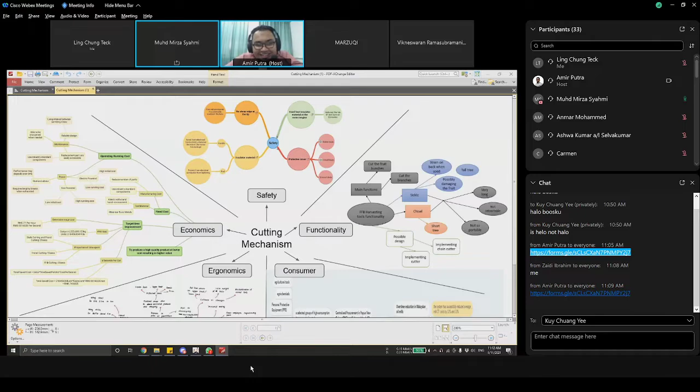Okay, so doktor, yeah, so we've done the discussion. There are 5 of us, so we are 5 people, so we took 5 topics. Oh, like that, ah. What I understand is that your idea was that everybody has to do their own background research for that particular topic, so this one is the safest way. Okay, so right, after that, the five of us together searched for what are the topics that we want to focus on.

So we started with safety, functionality, consumer ergonomics and economics. So from there we used a fair way to determine who gets which one, using a spin wheel. So basically it's random who gets which one, so we couldn't choose and pick which one we exactly want.

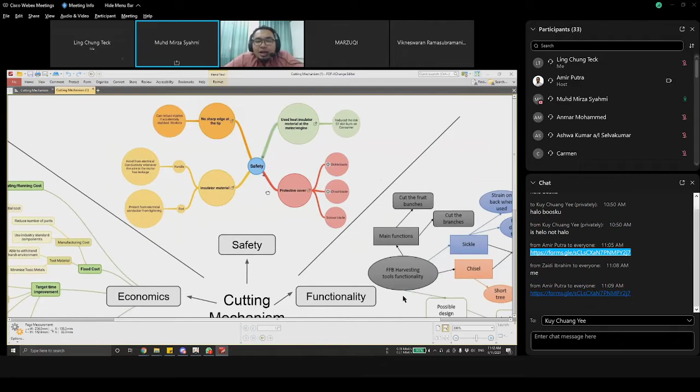Let's go to safety for a moment, I want to check. No, safety, sharp edges at the tip - no sharp edges at the tip, can reduce injury. Okay, this one is not quite right. I see, because, okay, what can you relate 'no sharp edge at the tip' with the currently practiced cutting mechanism?

I see, okay, right? This is the thing - the bubble map is different from objective 3. Objective, because the name itself is objective 3, so basically what do you want at the end of the day? So what do you want to achieve at the end of the day? So that is the objective. Okay, so that is the difference between objective 3 compared to the bubble map.

Bubble map is basically what is the current situation, in terms of definition for example, in terms of where it is going to cut. Okay, what types of cutting, what are the tools involved. Okay, when for example we say tools, tools for cutting the FFB, the palm oil one. Okay, so there you want to use what?

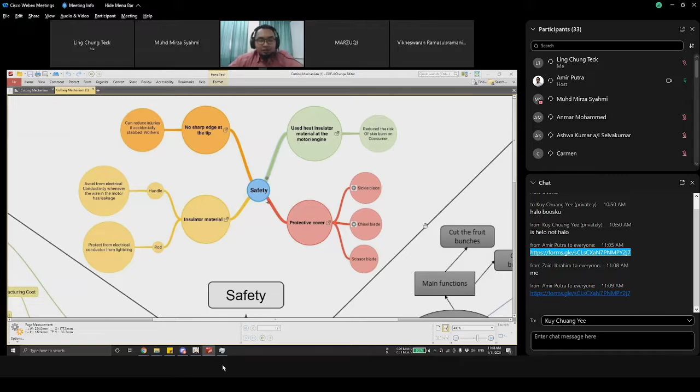See? Okay. So we go, you explore the current information available related to the problem statement. Related to the problem statement. Okay, so I think the other groups will be similar like this.

If you just look at something like functionality - chisel is the current one, short tree, sickle, possible damage to the fruit. This one related to current technology should be okay right? Okay, strain on back, okay, correct.

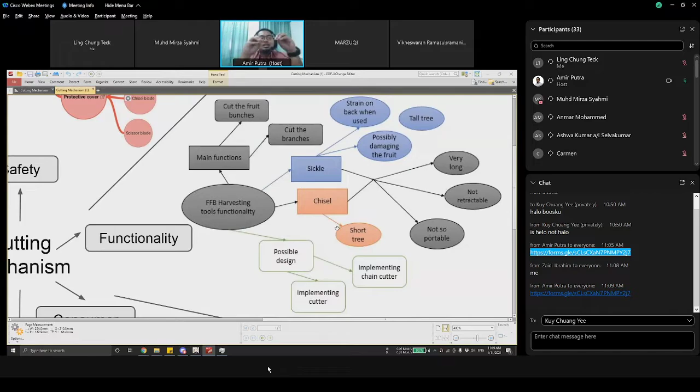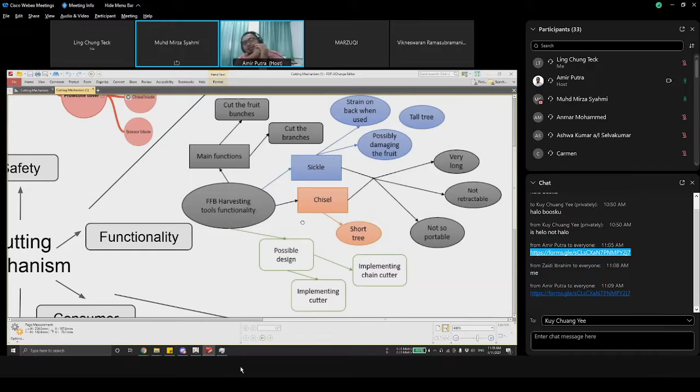Okay, alright. For consumer, this section focuses on - not really sure, but this one relates to who are possible consumers for the product, for this kind of tool. It's not about possibility, it's about who is the customer right now.

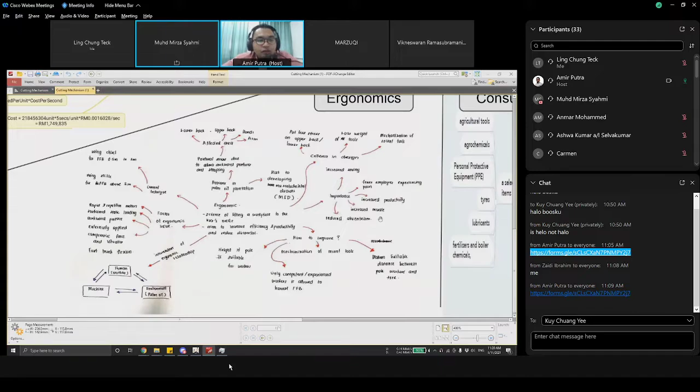I see, okay, alright. This is ergonomics. In December I will invite my colleague, my classmate from my degree time, he will give a talk on human factor in engineering design. He's now a member of the ergonomics society, so he'll give a talk on ergonomics. Hopefully they'll give you an advantage on this, but that's later in December.

Okay, alright, this one is economics - this one I did based on operating costs, how do you reduce operating costs, reliable design. This might fall under objective 3. Yes, correct. Maintenance, able to sharpen when needed, long interval between - reliable design.

This one I actually took from the internet, just to see what are the factors that increase the reliability. Reliability can become one of the main topics rather than become a subtopic under maintenance. Can I put it outside? Betul. Okay, because when we talk about why we buy this product, it's because this product is reliable.

So how do you define reliable? For example, even sharpening, how frequent do we need to sharpen - that one also falls under reliability, not under maintenance.

Maintenance is what we're looking at now, in terms of objective 3 later on. So in terms of maintenance, what do you define as maintenance? For example, it doesn't need many components, only one single part.

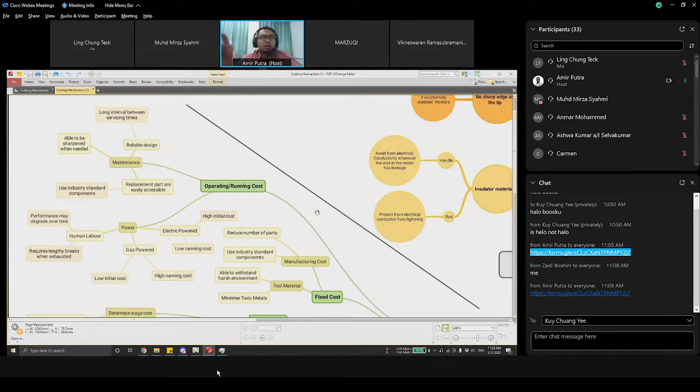So we don't need to service other parts, we just need to clean the tooling, that's it. So maintenance is very low, and normally once we relate it to maintenance, the way we assemble and disassemble the main mechanical component that involves motion, normally we make it a modular concept. So that when taken out, for example if you want to maintain your car, you don't need to open the chassis, you don't need to replace the whole thing, just open the hood to take out the engine.

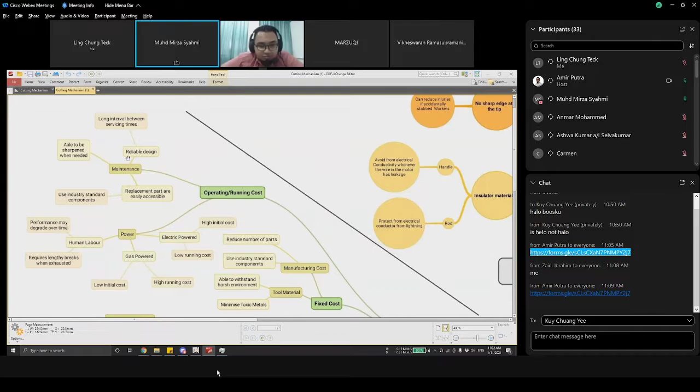So would the maintenance still be correct? This part would be correct, this part still correct. Okay, for example this is the power - I did research on electric powered, gas powered, and human labour.

For electric and gas powered, what are the cost and benefits? So this is our current one - human labour performance may degrade over time, requires lengthy breaks when exhausted. This is our current situation.

And then let's say if we take electrically powered, the initial cost for investment is very high, but running cost is very low. So should this go into objective 3 or can we keep it here?

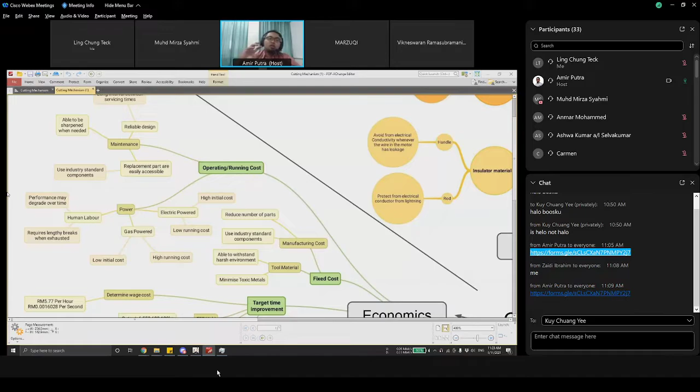Okay, so like earlier, based on the possibility you predict you want to have this thing on your final product, you need to put it in objective 3. If not, no need.

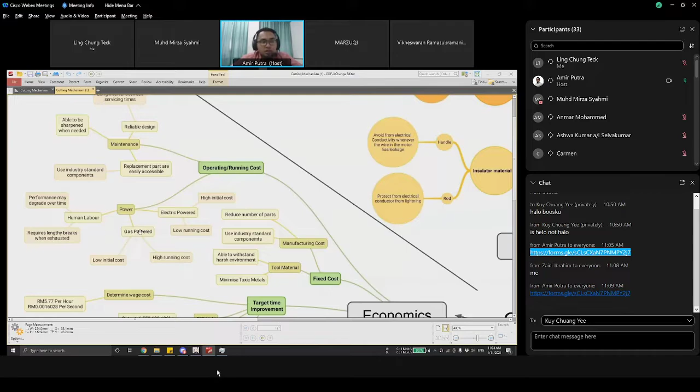Okay so let's look at the example, where we can include it. At the end of the day, these are the things you want - the features of our product that are mandatory. So like gas power, electric power - there's a possibility we'll only take one out of the three for objective 3.

Ya betul, I see. Okay, this is correct already, what you did in terms of understanding the power. Exactly. Okay so fixed cost is for material and manufacturing cost. For material, I guess if it's fixed cost for production, harvesting lah. Betul tu.

Okay, so this is target time for improvement. For this one I did some research using the annual report from Sime Darby Plantation. So first I determine the wage cost is about this amount per second. And then I find the yield using the hectares they actually own, and then their output per hectare, and then I divided by the weight of one FFB.

So we get this number of FFB, and then total saved cost is basically the number of FFB multiplied by, let's say we save 5 seconds, multiplied by the amount of money per second. So let's say we can save the process by 5 seconds, we would save Sime Darby 1.7 million.

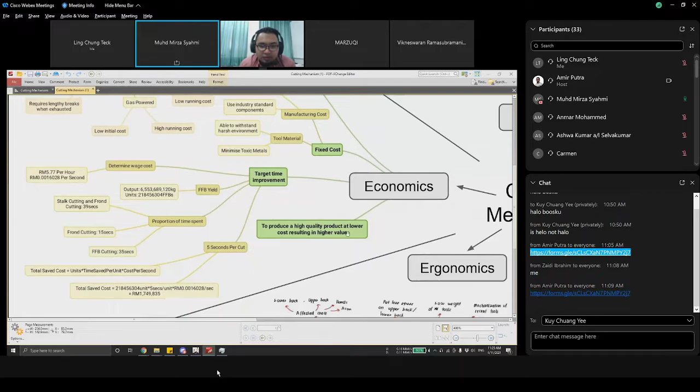Ya, that's productivity. Okay, good.

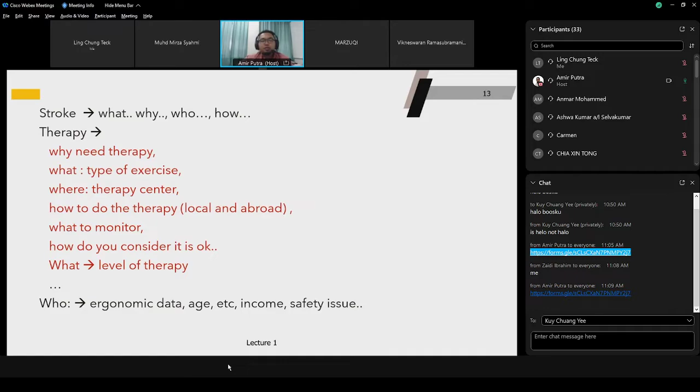Doctor, just to confirm this - basically we want everything that's a current issue, related to now, 100%?

Okay, and for example we can also take why there's an issue with labor. One, the first one because of government policy. Is there any other issue?

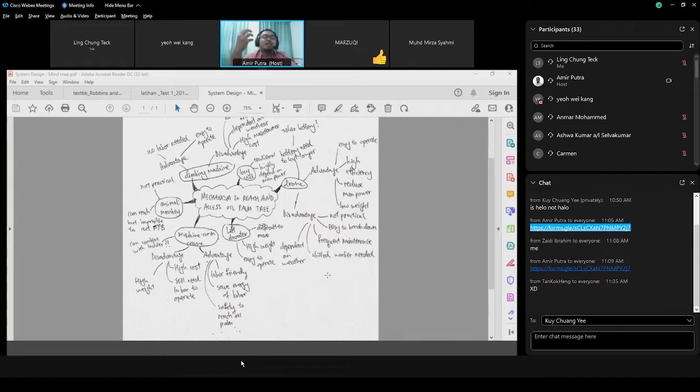Why? Why? Why apa? Why apa? Why would like to reach? So why apa? So kena tengok. So maybe what is the size of the fruit? So what is the weight? So you pergi the second topic is that you discuss detail pasal dia punya FFB tu. Fresh fruit bunches tu. You discuss detail pasal tu. You nak tengok loading ke, dia punya weight, dia punya size of dia punya apa kita panggil tu, tandan dia punya tu, tandan sawit tu. What is the size? You can go to that detail. So bila nanti contoh for example you nak access, you nak reach, you kena ambil kira all those element. So you kena tengok question apa you nak tanya. Then you expand it. Hopefully benda ni boleh selesaikan segera lah.

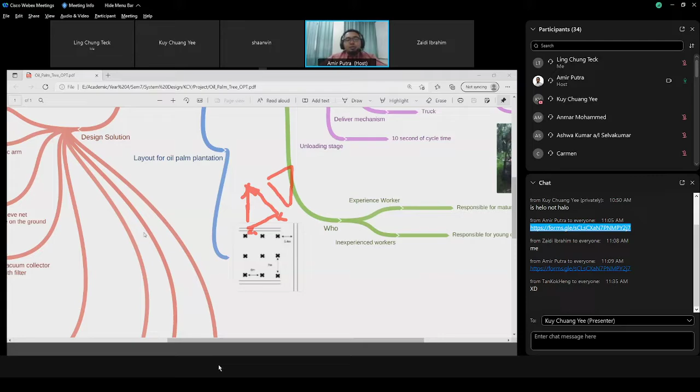Tu apa yang be implemented by Sime Darby. Dia punya distance tu later on saya rasa boleh dapat. Kalau tak ada, nanti kita cari. Saya boleh turun dapatkan, because I need to visit them next week. Kalau ada siapa-siapa nak ikut, tapi cost sendiri lah.

Okay, alright. And then we also list down the issues, the current issues in the oil palm tree field, like manpower issue, productivity issue, environment issue.

I think this one is better. I think it's almost complete, because what you need to do is list down. You keep searching, you see the video, what other information you can add up. Yeah, I think this is somehow a good example of the current bubble map concept.

Okay, in this mind map. Okay, right. So is it in objective 3 for the design solution? Sebab bila you buat design solution ni ada robotic arm kan, ni masuk dekat morphology nanti. Oh okay, morphology chart. Sebab dia pergi pada feature, function and shape.

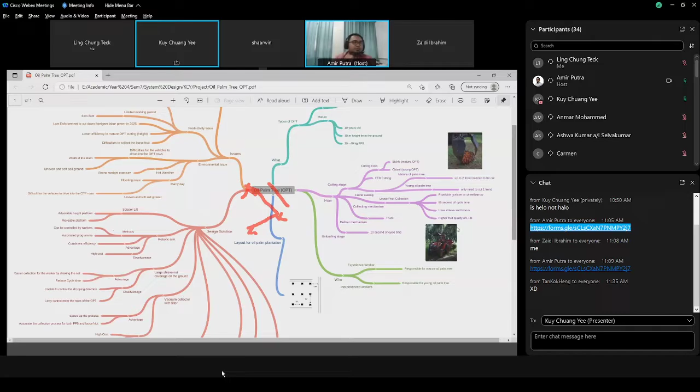Okay, I think this is good. Okay, ada lagi? Tak ada dah? Tak ada. Alright, okay, thank you Kui. Thank you.

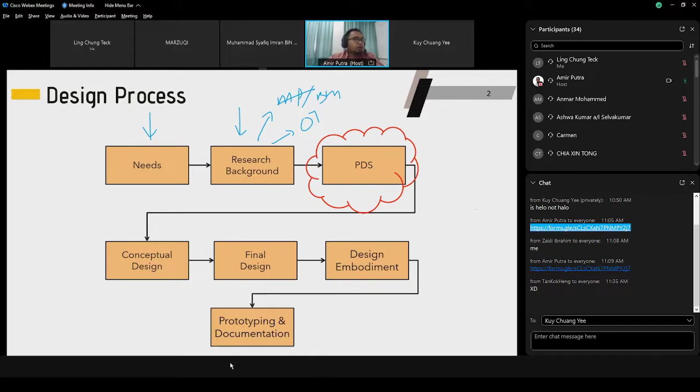Okay. And then after that, settle with that objective 3, what do you want? So we proceed with the PDS. So we want to set what is our product specification. This is what you've done before during I2D. Okay, so PDS will give you limit to your design.

So we don't want you to set, okay we want to go up to maximum 30 meter. Come on. Okay, better to set in terms of the medium one, go for example 5 to 10 meter. So this is you set the limit in terms of average. That is the easiest way. Don't set, okay we will reach 10 meter.

For example, once you conduct your concept generation, you make modeling, 3D model, and then you try to make virtual prototyping, and don't reach 10 meter, you only get 8 meter. So what do we say? Your solution is not correct, because it doesn't follow PDS. PDS mentioned 10 meter. So this is where we give room, tolerance, so that you can have a range.

Okay, whatever falls within that range, then that is acceptable. Alright. So where does value 5 come from, where does value 10 come from? This is from your research background. From your searching, from your market search.

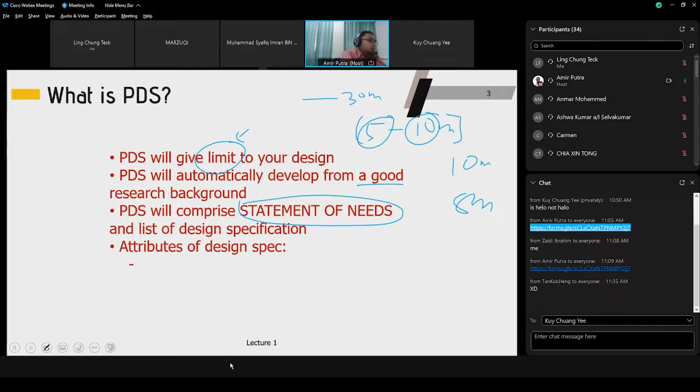Okay, and then attributes of design specification. This is example of PDS. For example, the statement of need: to design and build a design-to-win robot for robo combat competition. So design spec is what must follow game regulation. This is design spec, the first design spec.

Okay, put the weight maximum 25 kilogram. So that means if this robo combat is 1 kilogram, also acceptable. Okay, so what is the size? It mentions maximum, so whatever value below that value is okay. So that is how we interpret the specification.

Okay, so it must be able to move or return to its original orientation. This is important. So for example, if you propose a concept later on which does not follow this move or return, your concept will be scrapped. Alright, because you are not following the PDS. Alright, for example, maximum traction. So here it didn't mention any value.

This is a bit tricky, but somehow my suggestion, this is not the correct way. You need to put what is the maximum value. Okay, so maybe you put it in a range. So why do we need maximum traction? Because to ensure that our robot can win during that competition. So what is the traction that you want? So we need to specify so that you target that specification, you will design based on that.

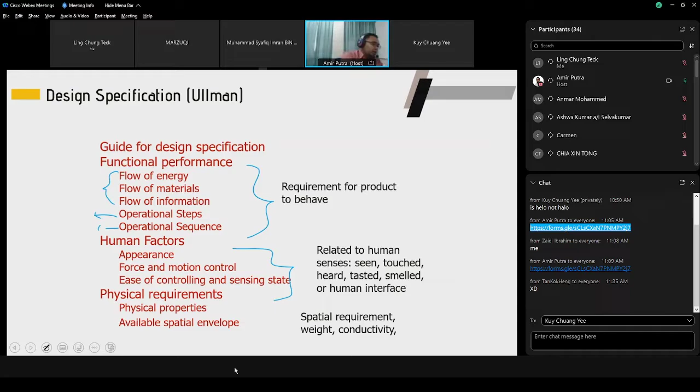We can also embed certain parameters in terms of human factors, related to human sense, in terms of appearance and aesthetics. How do you measure aesthetics in an objective manner? A lot of it depends on human perception, so you can put it on a scale - I'll show you later. Then there's physical requirements about physical properties as well as available spatial envelope.

Continuing from this, reliability can also become one aspect of your PDS. What are we looking at in reliability? Mean time between failure - what is that? For example, if a harvesting technique works for only 10 times and then fails, that is not reliable. Better to use the old version. How long can it last, how many years? So how do we calculate that?

Can we analyze if it will stand, for example, for 10 years? You need to calculate based on static and dynamic cycling analysis - this is fatigue analysis. Is there any fatigue point in that particular cutting tool? To that extent, we can expect - so here you put reliability, for example, 10 years - then you need to prove later in your calculation that it can withstand up to 10 years.

Safety, hazard assessment. Life cycle concerns in terms of distribution, maintainability, testability, and also retirement. You need calibration and changing. But normally in life cycle, we are concerned with maintainability issues.

This also continues from the last one - resources concern. Is there any issue with time, any time constraint? For example, for this system design, what is your time constraint? You have another 10 weeks to complete this project - so that time needs to be put in terms of resources concern. Is there a cost concern? I think yes, cost is a concern - what about your capital expenditure, your CAPEX needed, and how many units do you require?

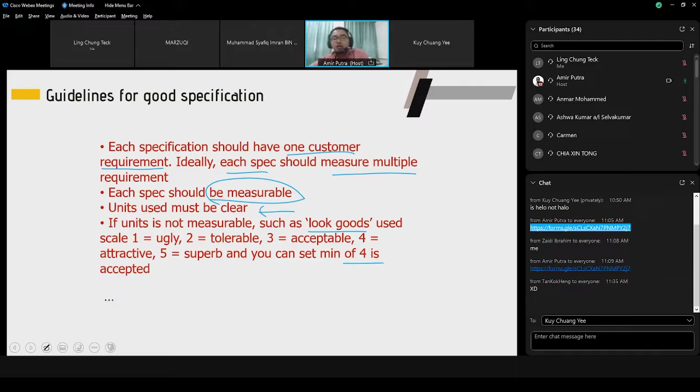So you must use a scale to ease us to give a rating. The scale: number 1 is ugly, 2 is tolerable, 3 is acceptable, 4 is attractive, and 5 is superb. And then you decide, you set the minimum scale as number 4, that is the accepted one for your product design specification.

Okay, that's it, done. We will see the example of PDS that I would like to show. Is there any question?

Is Sabbir here? Yes, doctor. Is there any question from you? So far, no, it's okay, sir.

Alright, this is an example of PDS in a statement of need. You must put it in a statement. Last time in my I2D class I summarized it in terms of a table, that was for the introduction class. But for system design, we have agreed to make it in terms of a statement.

So how do you want to do a statement? The first one, you put your mission statement. Here is an example: a beach cleaning machine.

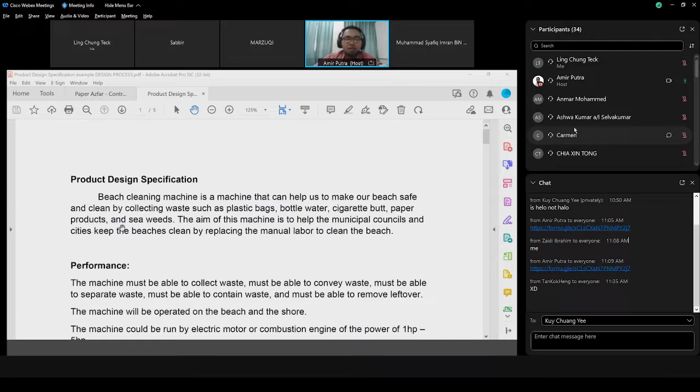Alright, settled with that. This is your first PDS parameter in terms of performance. The machine must be able to collect waste, must be able to convey waste, must be able to separate waste, must be able to contain waste, and must be able to remove leftover.

This refers to the functional process of that machine, so this is what is meant by performance. This machine can function to collect waste, so that is the first function, the functional parameter that you specify in the PDS. This machine must be able to function in terms of collecting waste.

The second is must be able to convey waste, the third is separate waste, number 4 is contain waste, and number 5 is remove the leftover. So these are the 5 functions that must be in that beach cleaning machine, you need to specify this in terms of performance.

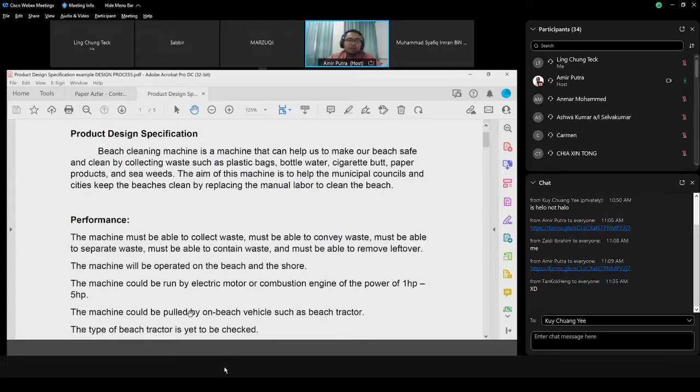The machine could be pulled by on-beach vehicles such as beach tractor. So based on this statement, we could understand this performance means they didn't design a complete whole set with the tractor. No, this is the kind of attachable, attachment to the tractor only.

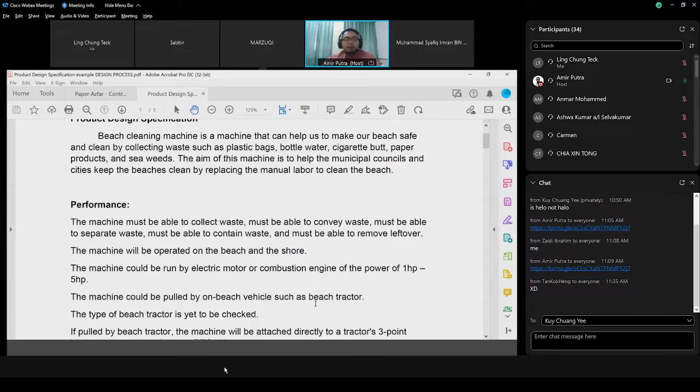The type of beach tractor is yet to be checked - I think this is not a good statement. Better you need to identify the types of tractor used, because different tractors will have different joints to assemble and different systems. Sometimes probably this tractor is using hydraulic, another tractor maybe using pneumatic concept, another tractor maybe fully mechanical one. So that one you need to specify.

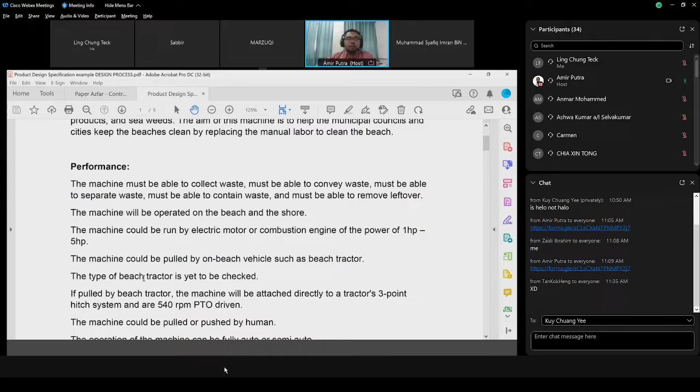If pulled by tractor, the machine will be attached directly to a tractor's 3 point and 540 RPM PTO - PTO driven, that's the coupling. The machine could be pulled or pushed by human.

The operation of the machine can be auto, semi-auto, and the pickup weight for full load of this machine is 10 kg, the speed is 20 and so on. So I will give you this PDS, you need to go through it so that you have a clear picture of what parameters will be involved in your PDS.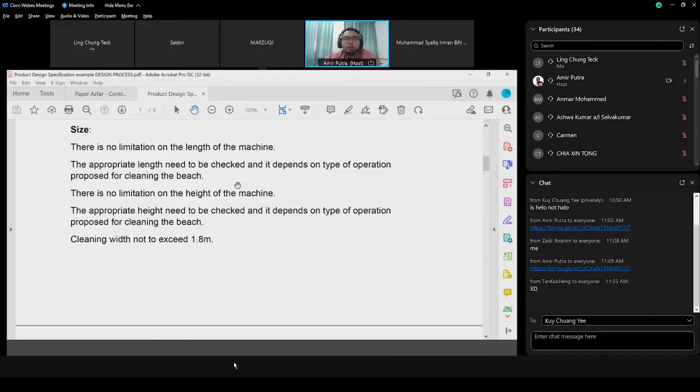But somehow you need to specify, because after this you need to propose your solution through your sketching. For example, your colleague, your team member designs a 1 kilometer length - even though that doesn't make sense, it still follows the PDS. So that is not correct. Better to put some value - put the maximum one if you're not sure yet. The appropriate length to be checked and so on. This is not a good example, but somehow you need to put some value that is measurable.

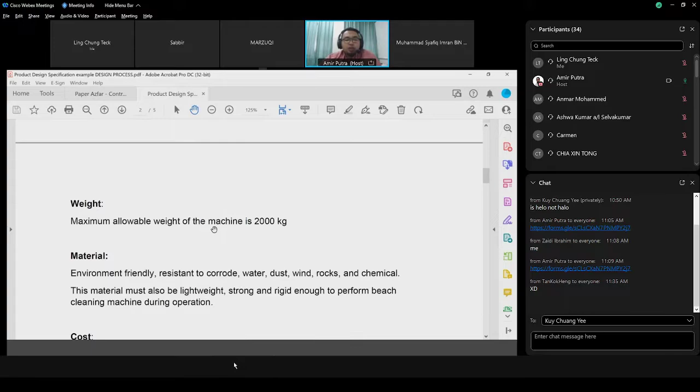Cleaning width not to exceed 1.8 meters - this is fine. Weight 2000 kg, material environmental friendly, resistant - that is a category, that is okay.

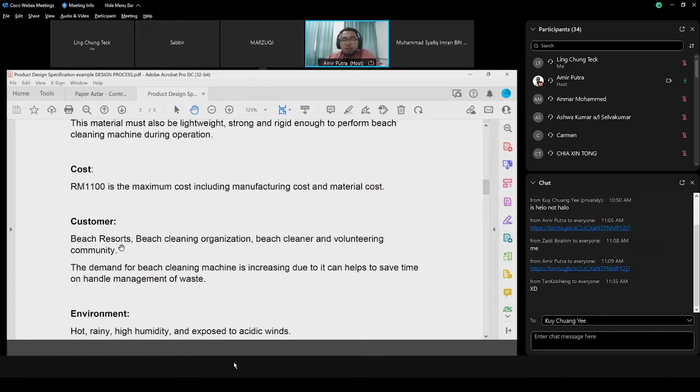Cost, estimated cost. Customer - who is your customer target? For these cases, for this project system design class, you can go to any plantations that require this machine, focusing on the SAMDABI. Environmental - what is about the environment involved?

For example, our country Malaysia - hot, rainy, high humidity at the plantation and so on. How many quantity? What about maintenance? Easy to maintain - maybe you can set how many parts required. All critical parts must have spare parts.

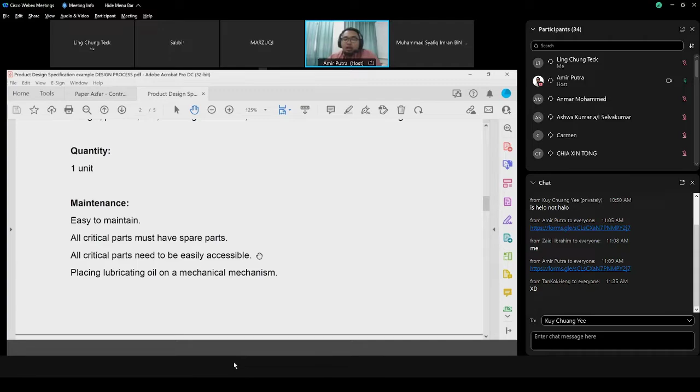This is for example only - do not copy and put everything. Select the one that suits you best. You can add up based on your requirement.

Product lifespan, competition - this is competition, you need to check who is your competitor right now. How to know? Research background, market survey. So standard as well - how to check, doctor? Use patents to check these things. Alright, service line and so on.

You can read through this PDS. I will put it in the group as well as in e-learning later on. Is there any question on PDS so far?

No, clear eh? Alright, no doctor. Okay, so we proceed to the next one.

Kenapa saya nak cepat? Because Kabir tak ada kelas, so nak kena cepat. Source of idea - okay, just a quick run through for source of idea, so how would you like to do it? I think you have done correct, done this one, we skip lah.

Okay, I will move straight forward to the concept generation, because later on after this you need to discuss in terms of functional process. Nanti sama juga ni, kejap.

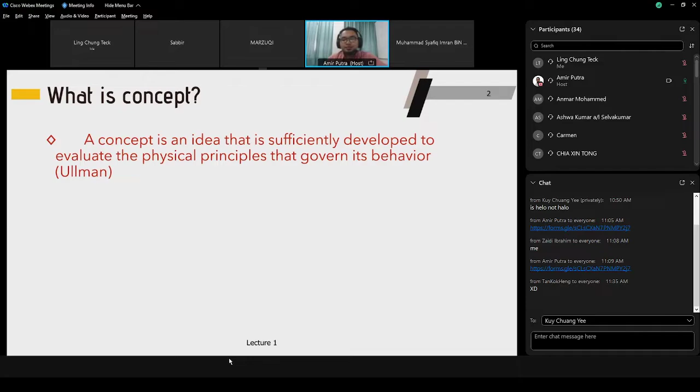Okay, we go first about the concept. So what is a concept? A concept is an idea that is sufficiently developed to evaluate the physical principle that governs its behavior. This is by Ullman. So this means you will propose a conceptual solution that will solve the problem or the needs provided. That is the whole idea of the concept.

Concept generation involves this 5-step method. The first one, this is what you have been doing: you clarify the problem. Through what? You understand it, you do the bubble map, you assign the task to every single person.

And please, again, I would like to remind everybody in your group, must do their job, their task. Don't protect your colleague, don't protect your member - it's not good for them. Because next year or later on you will become an engineer, so it's not good for them. You need to know how to search all these things.

And then you do the problem decomposition, you do the objective tree, and then you focus on critical sub-problems - so what are the main key areas there? So harvesting technique, that's what we do on the objective tree and so on. Alright, you come up with a kind of PDS. So right now we would like to detail this PDS.

So after that, what you need to do is go for the search externally. What do we mean by search externally? You refer here to lead users. For example, based on Samdabi - our client right now. Samdabi is our client, he asked for harvesting, mechanization of harvesting palm oil. So what are we going to propose? So you can search externally based on this user.

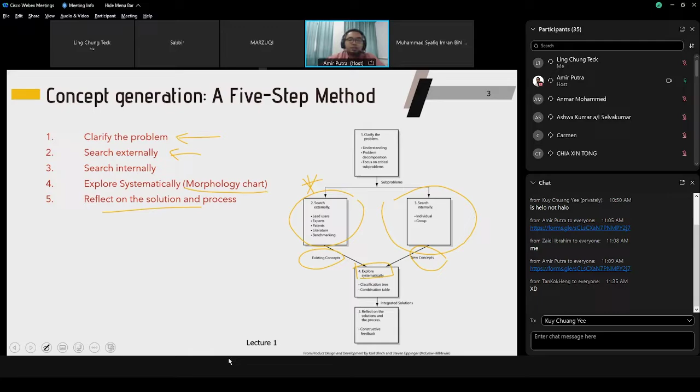Okay? So every single person needs to propose their own concept. The first one, clarify the function - already told you. So the first one is you need to develop a general statement, define main function, kind of the first statement performance inside the PDS, right?

The second is create sub-function description. Order the sub-function - function, we are referring to the function, not numbers, length and so on. We are referring to the function. Here is clarify the function only.

So develop the general statement - this is what we mean by develop the general statement. Goal is to generate a single statement of the overall function. Basis of the statement, functional aspect based on the... what is RE? I think it was mistakenly put here.

So based on the problem, for example, here is the coffee maker example. What is the input? Input here - water and coffee powder, simple right, so that is the input. So what is the output that you want? Coffee. Done, this is what we did.

We go to the hotel, for example, for breakfast, we see the coffee maker machine. We would like to have an espresso coffee, then we press that button, after a few seconds we get our coffee. Done. So what we want to know is what happened inside that coffee machine?

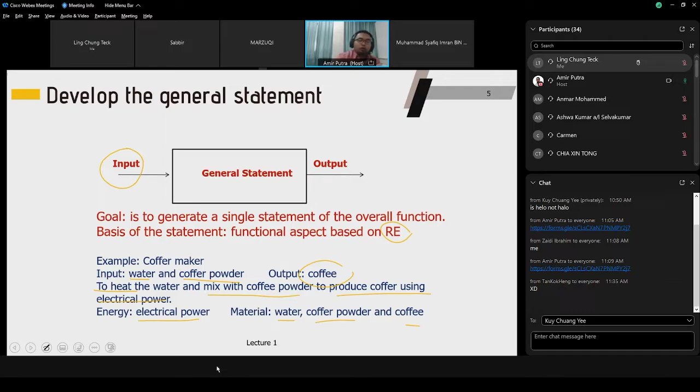So create the sub-function from the example. This step we identify the sub-function needed. So the guideline for this: an object that has energy, material, and information transferred from one object to another.

For example, coffee maker - people will switch on the coffee maker, you press the button, then the coffee maker will boil the water and mix the coffee. So this is the information we can gather, with the hot water and finally producing a cup of coffee. So the energy involved is switch on, the heat to the water.

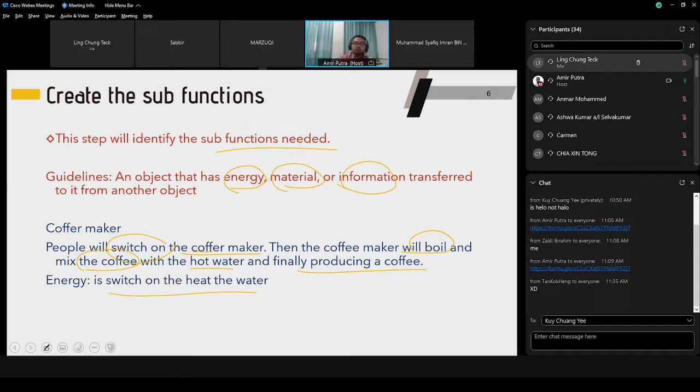So order the sub-function - right now here we create the sub-function, and the third step is to order the sub-function. Once you order, you want to put a number. So this is the first one, boil the water. Second function, mix the boiled water, and the third one, filter the mixture. You cannot put filter the mixture first.

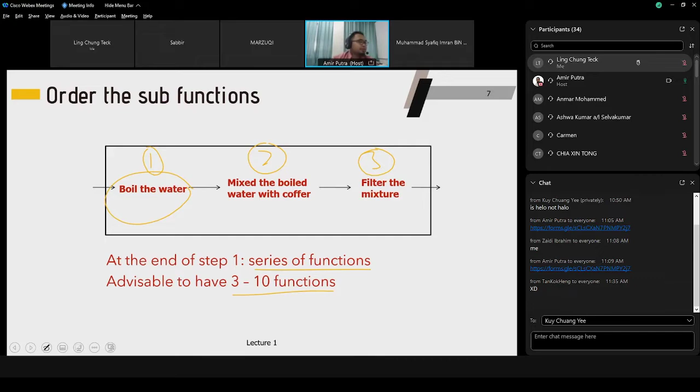So you need to put it in an order because that is the function that you want in terms of sub-function. So at the end of step one, there should be a series of functions, and it's advisable to have 3 to 10 functions. This means to boil the water, what is the sub-function involved - electrical power, energy and so on, you need to put here. It must be ready, a cup there and so on - you need a container to hold the water. So those are the features, later on in the details of the sub-function.

So refine the sub-function - there's no right and wrong. The concept here is very important, no right and wrong, but most importantly the function decomposition. We decompose the function, and it must be comfortable with the team member.

You cannot have a one man show. Even though there must be one person who gives the idea, you need to discuss and accept together. This is the really critical point.

Because if you don't agree in terms of the process and the PDS, your concept solution, I can identify that you are not following the discussion as well as the PDS. Inside the PDS, the product design specification, is basically a statement. Behind the statement, of course, you have a discussion, and a lot of things have been considered before you come up with the final decision. So once you follow with that, you have a clear picture of what things have been selected.

A good rule of thumb is 3 to 10 sub-functions. Certain designs require 2 or more overall function decompositions. This is straightforward. After that, with the order and sub-function, we are already clear with the functional process and the functional structure.

Now we move to the details, in terms of a systematic approach, we are using the morphological chart. Morphology refers to the function as well as the activities. For example, to boil water, how do you boil water? What would you consider, by heating? What else? How? So you give an option. This is the first function.

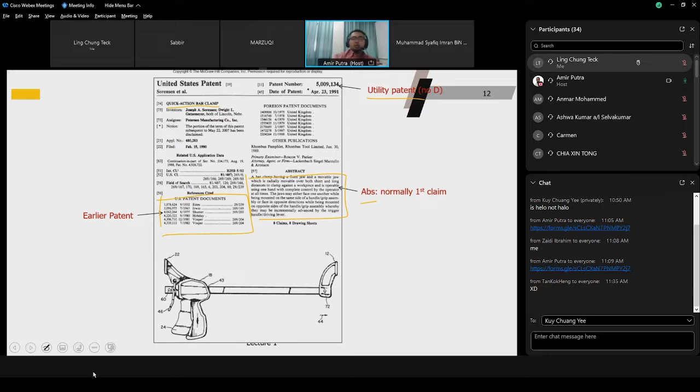Alright, so number 3, step 3 is basically search internally, which I explained to you, which is we apply a creative approach through brainstorming, no hindrance. Don't have issues of disagreeing with people. If you disagree, please be in harmony. Let's give positive feedback, don't scrap your idea or other people's idea.

Explore systematically. We are using the morphological approach, and then the concept combination table that I told you just now. This is the concept for every single person. I think many already know this, I will show you after this.

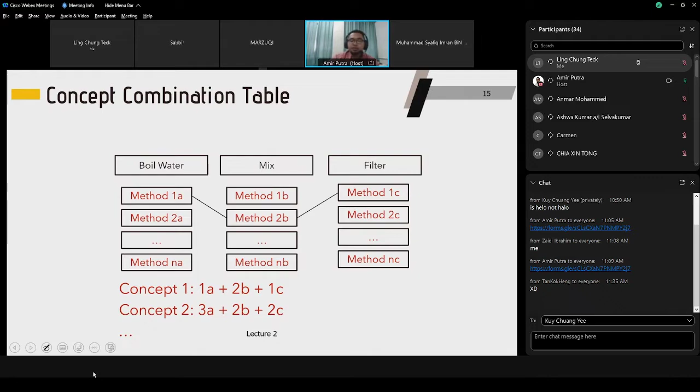Okay, and then reflect the result. Are your team confident with that solution? It can be this way: for example, later on, you have 5 members in your group, every single person will propose their concept solution through sketching.

And then, before you do this scoring matrix, you can give advice to your colleagues. I think this is not a good sketch, you are not following our PDS. You can do that, but somehow it must be done in a harmonious way.

Alternative function diagram, an alternative way to decompose the problem. This is the way to refine and reflect the result. I will skip this one, and this one as well. This is more in terms of the flow of energy, material, and information.

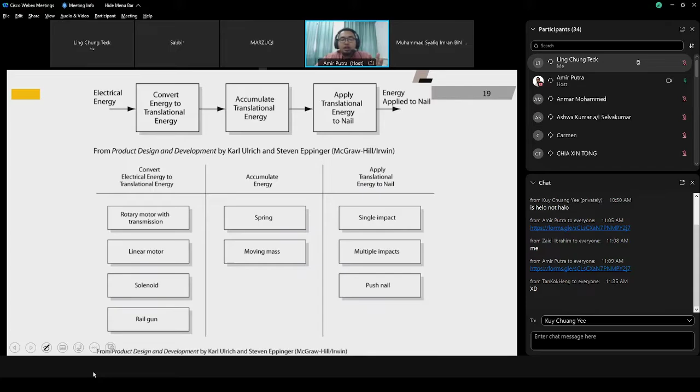Sketches in conceptual design are important to explain the function, forms, and components. Functions, forms, and components, you need to be detailed, to a certain detail, up to being self-explanatory. I see your sketch, this is what?

Okay, so what is the function of the bolt? Where is this bolt located? We need to see clearly in your sketch the level of detail that I mean, to the level of self-explanatory. You can do a self-assessment to check whether your sketch is sufficient or not.

Alright, I will put an example of the coffee maker case study. I think this is for I2D class also, I have shown this previously. So this is the way we come up with objective tree.

So basically what we want at last of our automatic coffee machine is in terms of safety. So what do we mean by safety? In terms of it doesn't burn our skin, and splash proof. Here we might think splash proof in terms of the flow rate of the coffee poured to the cup nicely and don't splash. So you need to control the flow rate once pouring.

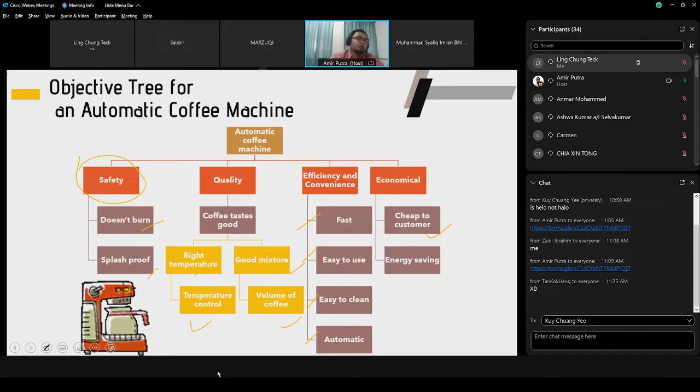Same goes to economy: cheap for customers to buy, affordable price, and energy saving with low kilowatt use, for example. Alright, so overall function diagram.

This is the input that we want, and lastly we have the coffee beverage. So we might think of what flows are associated with materials, energy and information, which should be in logical or temporal order. So this is the function tree that we need to look at.

I think you are familiar with this, so I will skip it. Lastly we deliver the coffee, and because this is the process, the function process, the sub-function process, that's why ideally we involve 2 or more, but normally it depends.

So for function structure, this is what we mean by flow of energy, flow of materials, and lastly flow of information given inside the flow of functions. Okay, up to these details.

But somehow normally I will just focus on the mechanical part. But this is really important so that we have a clear picture. What is the energy involved? Conversion of energy, what are the conversions of material, what are the conversions of information involved? This is a good example.

For example, conversion of energy: changing energy from electrical to mechanical. For conversion of material: solid to liquid. So what do we mean by solid to liquid? The coffee powder is in solid state, you want to change it to liquid. So what are the elements involved?

Same goes to the conversion of information, changing the signal from mechanical to electrical. From the trigger button, it will trigger the electrical part to flow to boil the water. So this kind of information we call as function structure of flow information, functional flow.

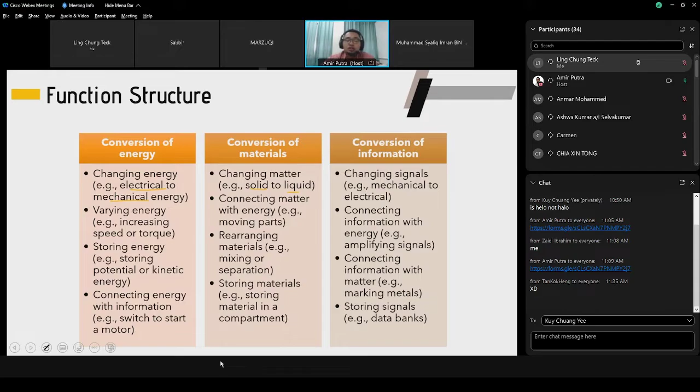This is the function structure, what I mean you need to deliver later on. This is the function structure that I mean you need to deliver later on.

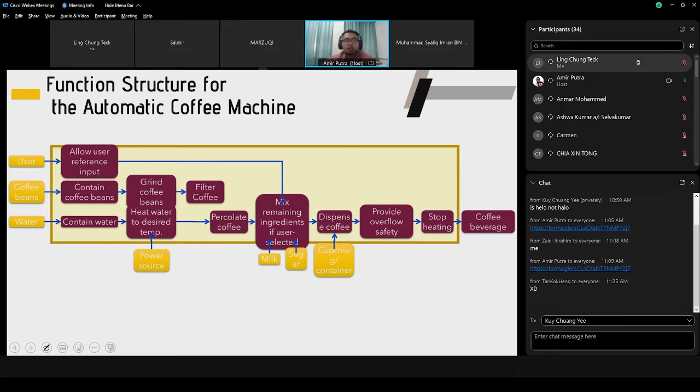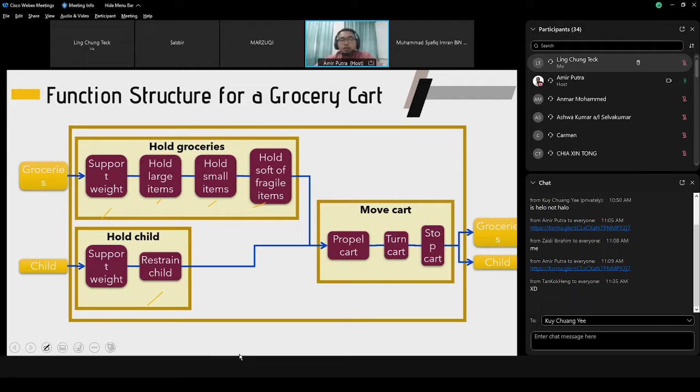This is another example from the grocery cart, the trolley. One is to hold the grocery, support weight, hold large items, hold small items, hold soft and fragile items. And then another feature is to hold a child. This is 2 sub-functions that you want in a grocery cart.

For example, the coffee maker just now, to boil the water. How do you boil water? Here is your first option, second option, the method. Method number 1, method number 2, method number 3. For example, to boil the water, the first option you put a heater, and option number 2 you put 2 heaters. That doesn't make sense, that's only quantity.

We are referring to the function, the physical shape, the verb, what it is. We are referring to the shape, what is the difference between this one and that one in terms of shape, not the number.

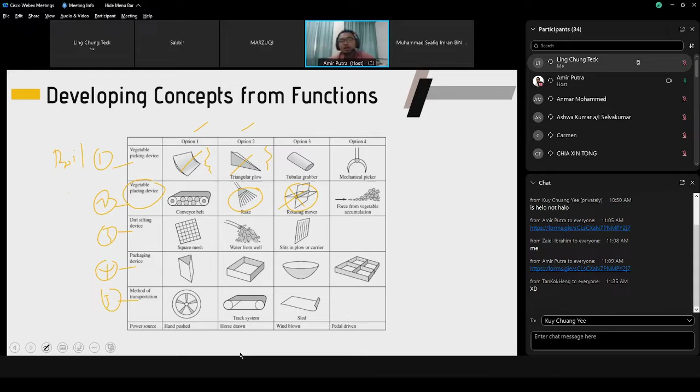This method will serve the function, so you need to provide this morphological study. Later on we will discuss the concept sketches. There is a way to know the detail of the sub function - a method we call reverse engineering in the function decomposition method.

Reverse engineering is a method to understand how a product works through a dissection process. I believe you still remember last time you did the dissection process using the mechanical pencil or mechanical pen, as asked in the introduction to design class - you need to disassemble all the components and put them in front of you on the table.

You sketch every single component, then write number 1 up till the end of the number of components, list them down, and then assemble again - all these things need to be sketched. This is how we do the dissection process to have an idea of the components, the detail of each component involved, how many, and what each is used for.

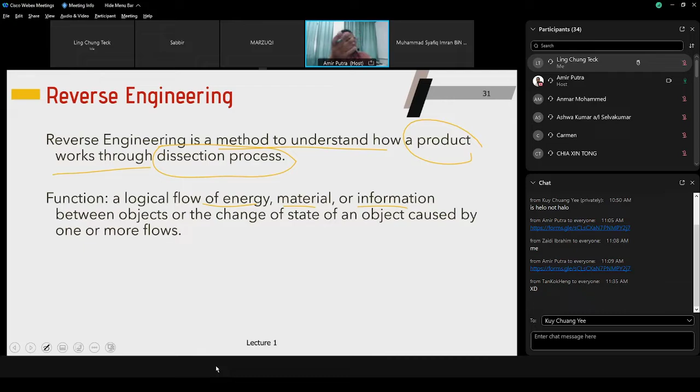Same goes for the function we are looking at - the logical flow of energy, material and information, between objects or the change of state of an object caused by one or more flows. The steps in reverse engineering, I think this is common to you.

Step 1: examine the whole device, examine the major interfaces. Step 2: disassemble the part for more detailed study - you can sketch the single part. And lastly, examine each interface in terms of energy flow.

This is the concept of reverse engineering, or what we call the functional process. As I mentioned above, I've said many of the same things again now - energy flow, information flow, and material flow. This is how important it is that you conduct it this way.

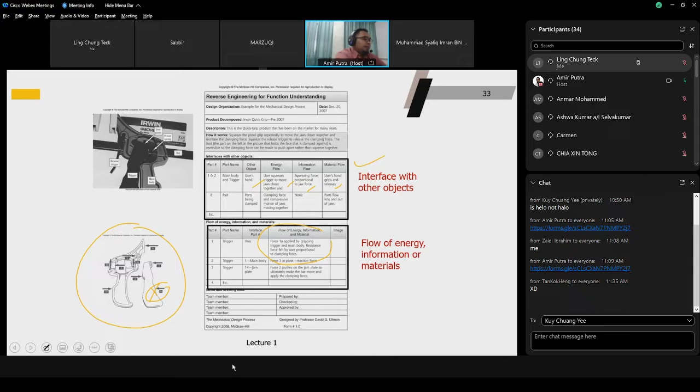For the flow of energy for the trigger - what is the flow of energy, information, and material involved? Force will be applied at point 1A here, by gripping the trigger and main body, resistance, the force felt by the user proportional to the clamping force. This detail will provide you a clear picture of the whole function involved in your product solution.

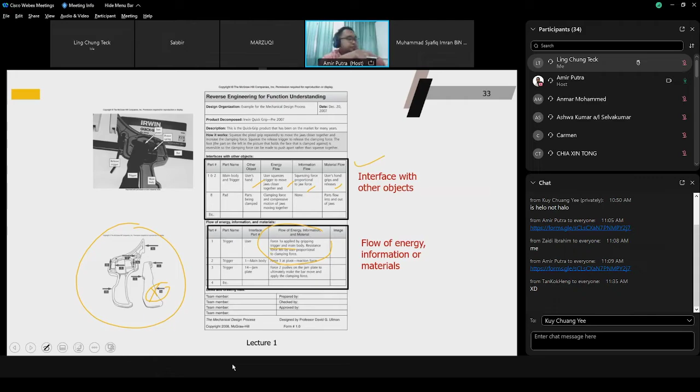I think for the last one, I would like to show you a video. Let me share a little bit.

This is the last one. So. Okay. Stop sharing.

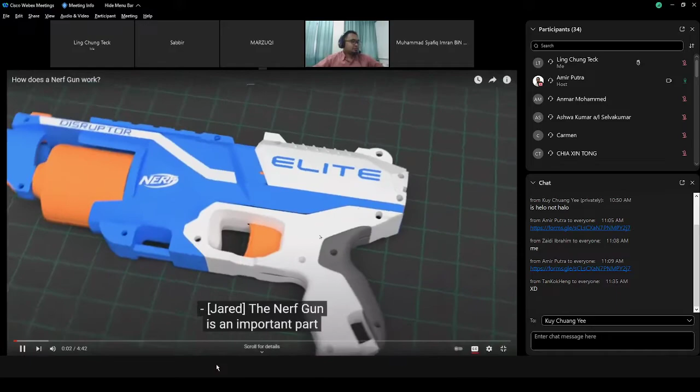Advertisement: The Nerf gun is an important part of every toy collection. Good for target practice, Nerf battles, and reverse engineering them so we can see how they work. Let's get ready to have some fun.

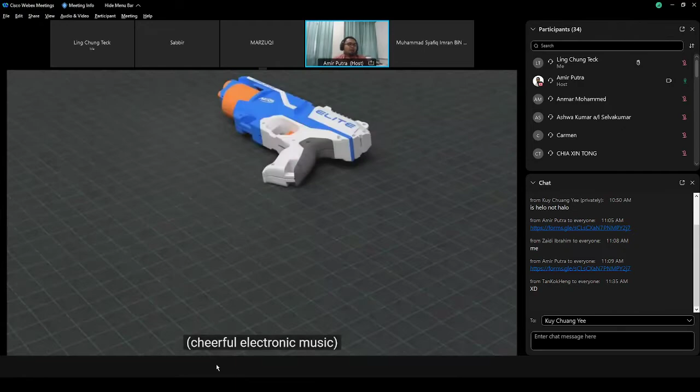This is one way to help you understand the subfunction, to detail the subfunction and examine the flow of energy, information, and material.

This specific Nerf gun is called the Nerf Elite Disruptor. 6 darts can be loaded in at one time. Pull back on the cocking mechanism, aim, and pull that trigger.

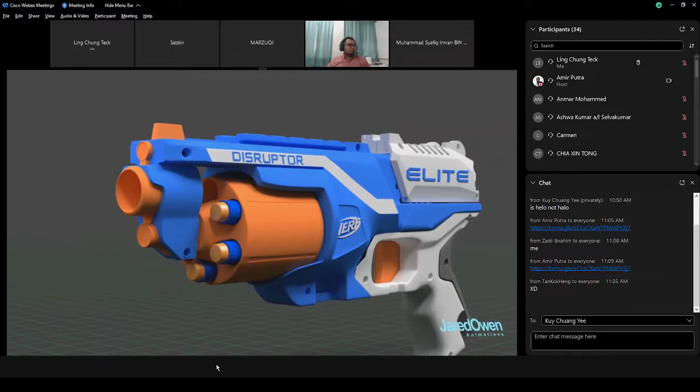You'll see on the left side of the gun a bunch of holes for the screws. If we take them all out, we can get a good look at what's inside.

Naturally, let's start with the trigger. You can see it's connected to a spring. You can pull the trigger back, but as soon as you let it go, it will spring back into its original position. You can see a bunch of extra plastic here.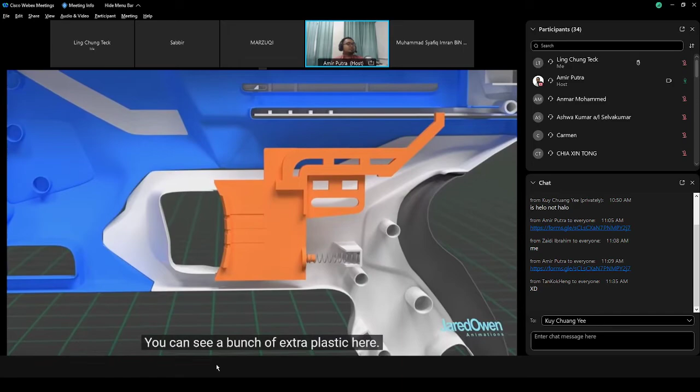This connects with another piece, which I'm going to call the vertical slider. This is normally held up by a spring. When the trigger gets pulled, the vertical slider comes down. I'm going to come back to this in a second.

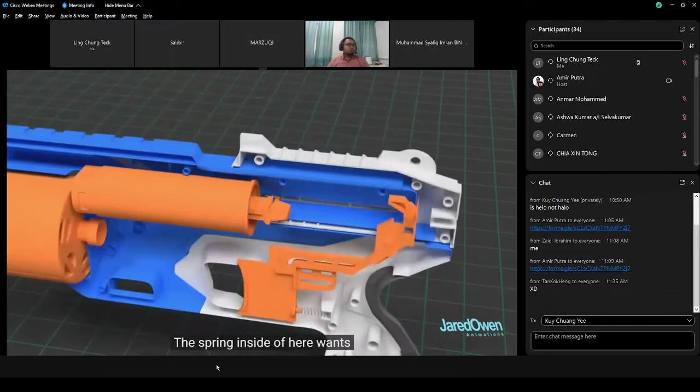This is the piston. It fits inside the tube along with a powerful spring. The spring inside here wants to keep the piston all the way forward. This is where the cocking mechanism comes into place.

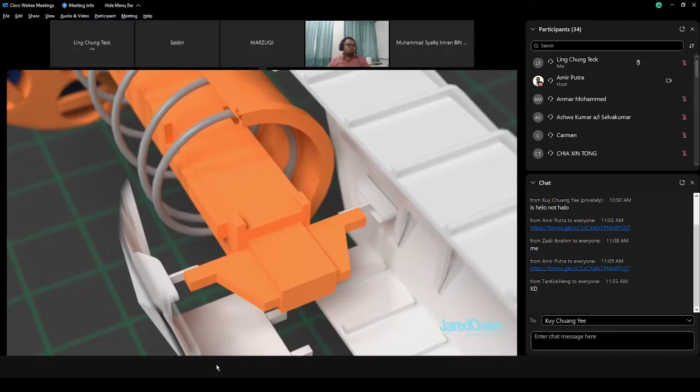Notice this small block sticking out here. When you pull it back, the piston comes with it. You can definitely feel that the spring is resisting as you try and pull. Pull it back far enough and it engages with the vertical slider and hooks in right here.

Now your Nerf gun is loaded and ready to go. One thing I want to point out is that when your gun is loaded, this orange strip will be visible from behind.

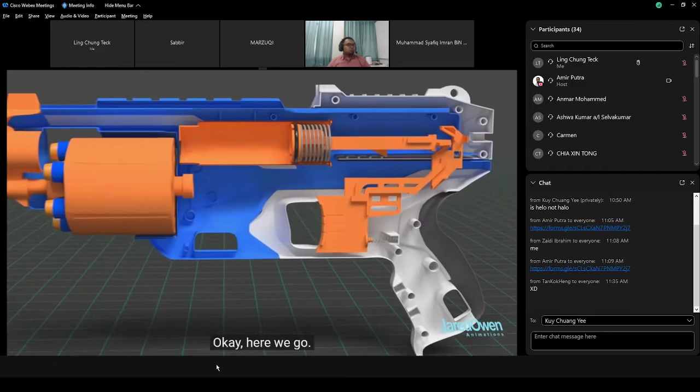Okay, here we go. Pull the trigger, the vertical slider comes down, which then releases the piston, which quickly springs back into place. All of the air inside the tube is immediately forced out the front onto the dart. Now after the dart fires, the cylinder rotates and the next dart goes into place.

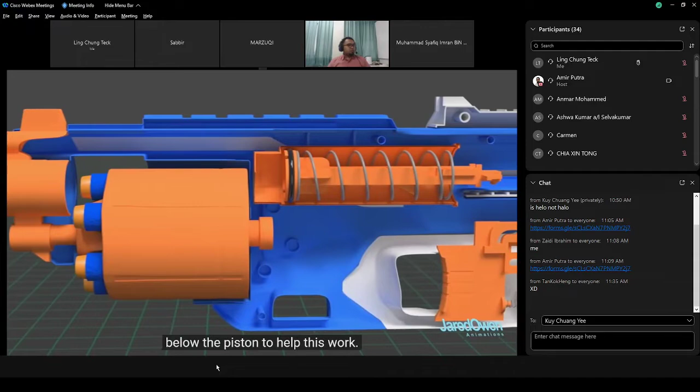Now how does that work? There's a few more pieces below the piston to help this work. There's some supporting black plastic, a white rotating cam, and the cam bar. When the piston comes out far enough, it will latch onto the cam bar.

When the trigger is pulled, the piston is released and the dart is fired, just like we've seen before. Followed closely behind that, the cam bar comes forward again, which rotates the cam, which then rotates the cylinder with all the darts.

Let's focus on just the cam and the cam bar. You can see each time the bar goes forward again, the cam rotates. The magic happens on the other side.

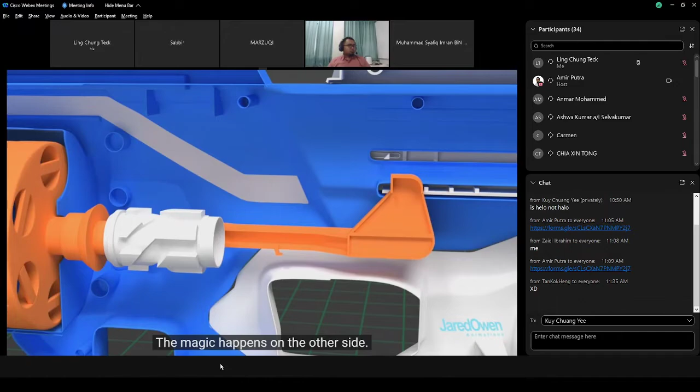The bar has a circular tip at the end here. The tip fits right inside these grooves here on the cam. As the bar goes back and forth, the tip will slide right through here.

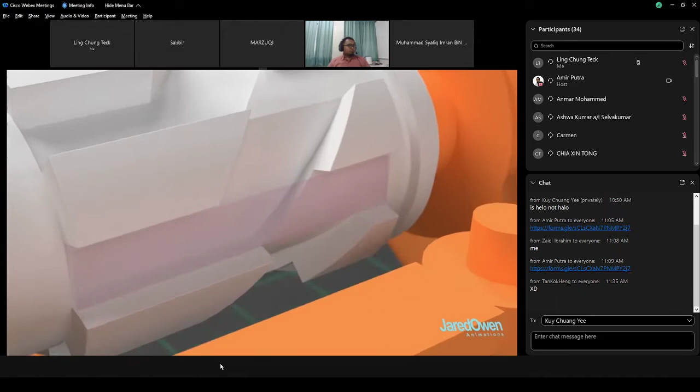Now the bar is positioned in such a way that there's a little bit of pressure. It wants to go into the cam. As the bar comes back, it will pass over this edge and go further into the groove. When the bar goes forward again, instead of returning to where it was straight ahead, it will follow along this side. When that happens, the cam is forced to rotate.

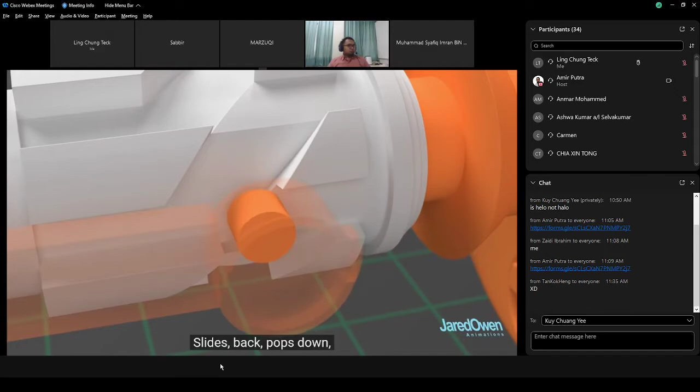Let's watch that again. Slides back, pops down, comes forward again, and follows the curve. Mechanical devices like this fascinate me. I can only imagine how much work this must have been to design something like this and make sure it works correctly. Currently, you can get one of these Nerf guns off of Amazon for about...

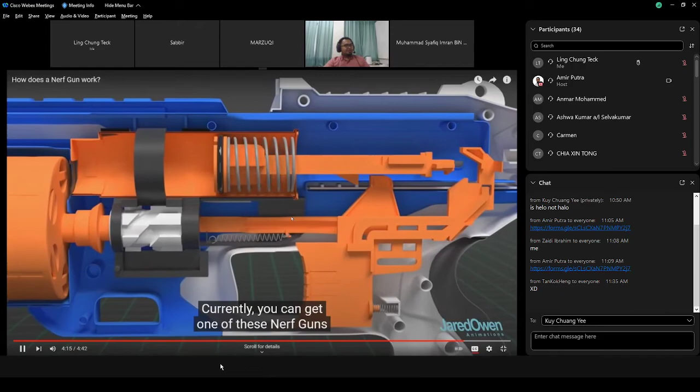Okay. Done. Alright, I think that's all.

I think you will summarize your virtual prototyping hopefully in that way.